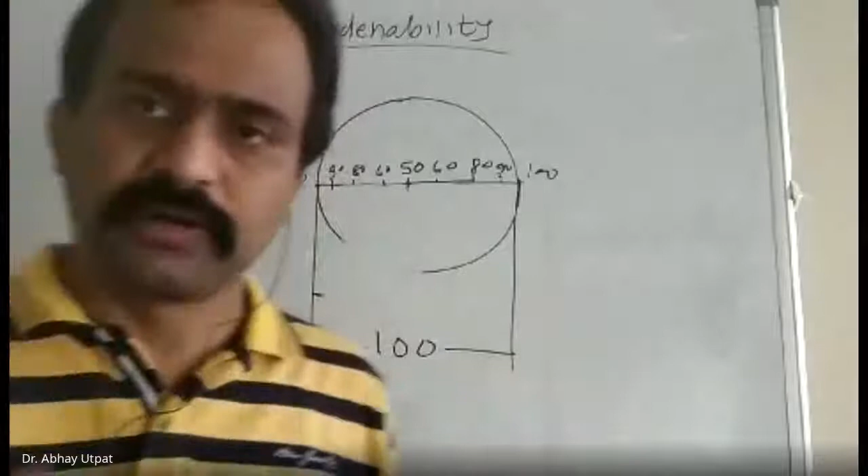Now suppose you are the customer, and I am the owner of a company or a metallurgist in a foundry or heat treatment shop, a regular manufacturer of components of different size and shape. As a customer, you want to know: I have this component and I am using this quenchant. If I carry out the hardening, will this part be thoroughly hardened or not?

So this is the question of the customer to the metallurgist. I repeat: I have this component, whether this component will be thoroughly hardened or not. Now, without checking, how can we tell whether it will be thoroughly hardened or not?

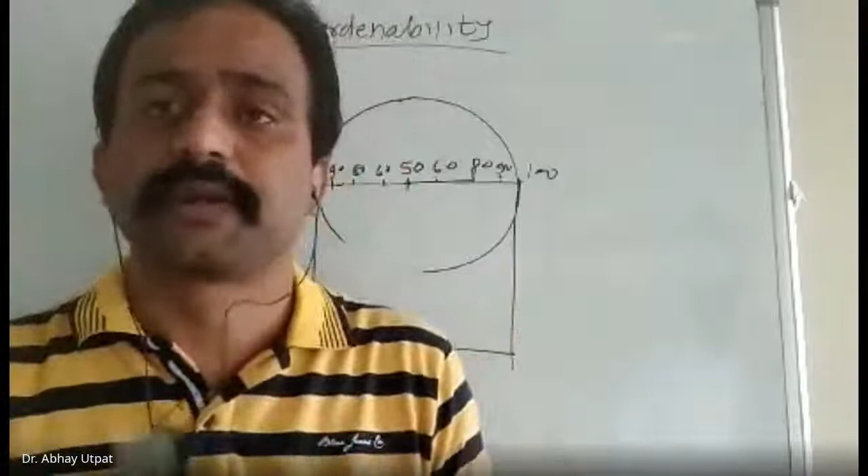So some experiments are carried out based on the concept of hardenability. The technocrat or metallurgist or owner of the company, through his team, will carry out one of the experiments, and without testing the customer's part, a report can be given: yes, if you use this material, this size, and this quenchant, your part will be thoroughly hardened. Now you decide what size to keep and which quenchant should be used.

So these are nowadays very important requirements in the industry, because if you blindly carry out the hardening process taking any quenchant, you may not get good hardness, and there may be failure of the component. That's why the method for finding hardenability must be studied.

Before we find the method for hardenability, recall the concept I told you: a part can be considered hard when at least 50% martensite is present. So you must know, every time we are not going to take the cross section, prepare the specimen and see under the microscope. Without the microscope, this judgment is given.

But for that purpose, some data is required. You have to check the hardness corresponding to 50% martensite. This means you have to prepare the sample and check under the microscope, locate where the 50% martensite is, make a mark, and then that part is kept under a hardness testing machine and hardness is measured.

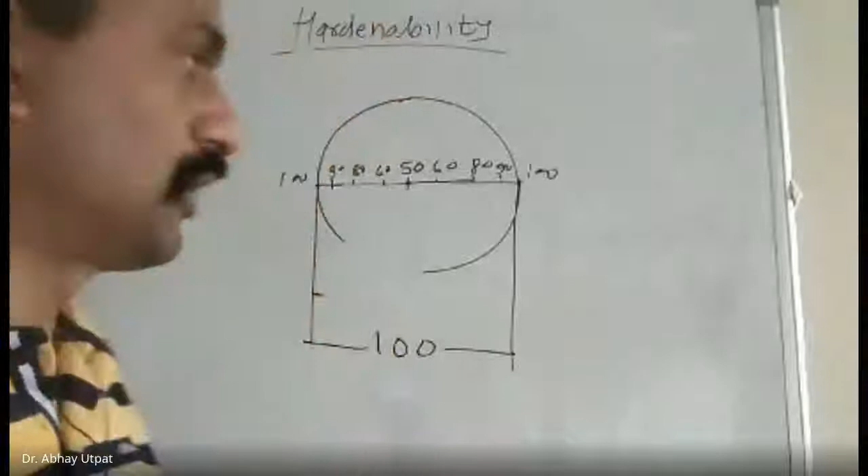For example, in the figure I have drawn here, I have shown that this part is thoroughly hardened because 50% martensite is present at the center, but it may not happen every time.

Now for that purpose, there are two experiments corresponding to measurement of hardenability. These two experiments are: first, Grossman's critical diameter method, and second, Jominy end quench test. Just write down the title: experiments carried out for measurement of hardenability.

First is Grossman's critical diameter method, and second is Jominy quench test. These are the two tests used for measuring the hardenability. Let us see one by one.

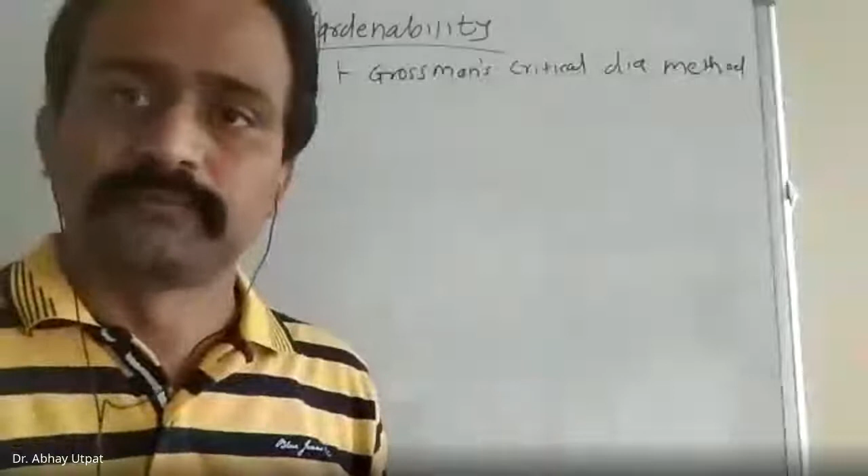Now I will follow Grossman's method. What I will do: first, I will prepare a number of samples of the same material used by that customer, because I will take the name of material from him. Then he has produced sample bars on the lathe machine. Before that, the hardness of that material corresponding to 50% martensite is found out. That data is required.

Suppose this is the plot where I put the sample. This is hardness, 0 to 5, 10, 20 RC units or BHN units, whatever it may be. Suppose this is the hardness value corresponding to 50% martensite - any value, suppose 25 RC. We are least bothered about the exact value; I only know that this hardness value corresponds to 50% martensite. It means if 50% is martensite and the remaining 50% is bainite, pearlite, whatever may be present, the corresponding hardness is this value, X value. Now, Grossman suggested the method.

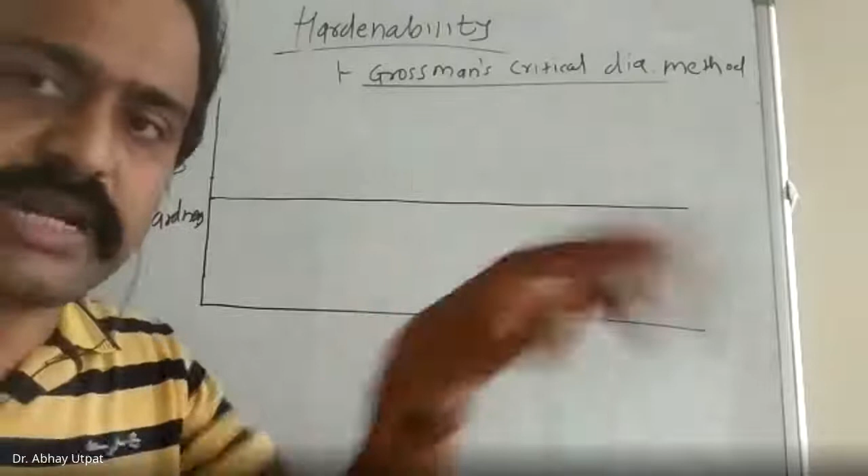According to Grossman, select a number of bars, start preparing the bars and start quenching them. I want to give information to that customer: what is the depth of hardness, what is that dimension up to which your part will become hard. So I will start, suppose, with a bar of 10 mm diameter.

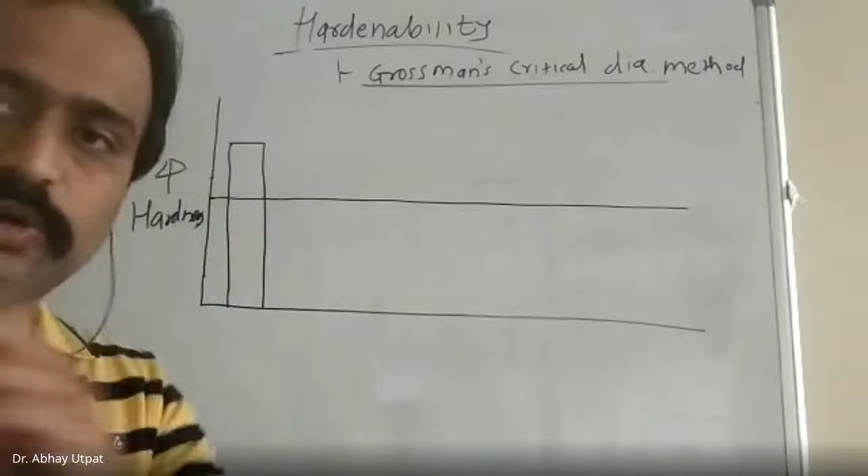This is one rod of 10 mm diameter. Now this rod is made of the same material used by the customer for making his components. This bar I will take, heat, soak and quench in the quenchant used by the customer.

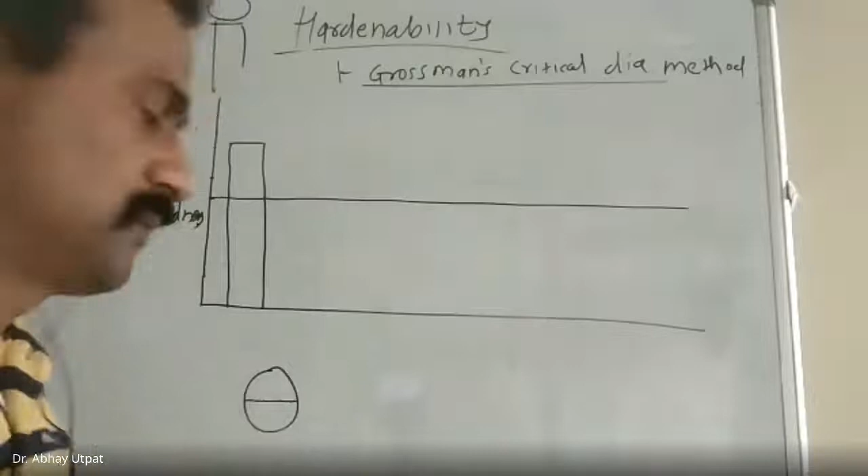After doing this, the hardness value is measured from surface to center. How? You have to take the cross section in this way. I will show here - you have to take the cross section and put your hardness tip, using a diamond or ball indenter. So here 1, 2, 3, 4, 5, 6, 7, 8, 9, 10 - at different points, hardness is measured, and that hardness is plotted here.

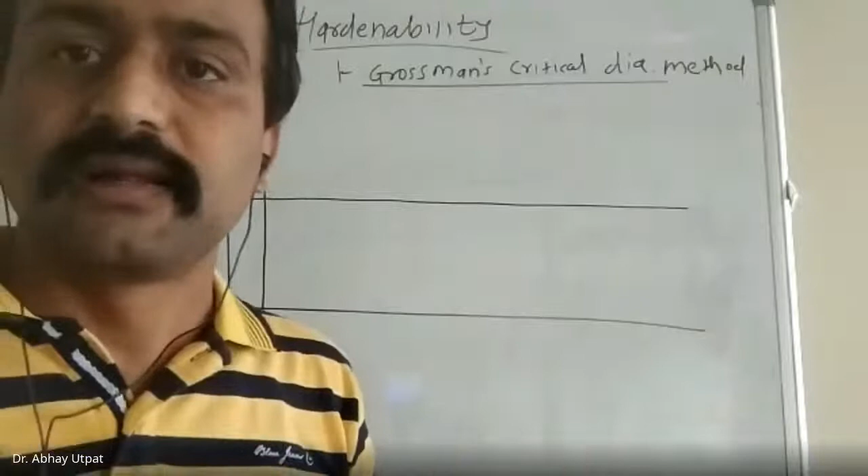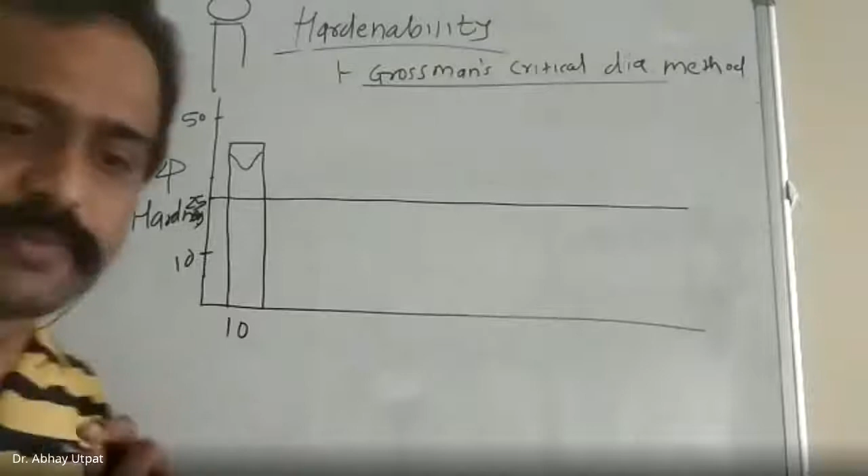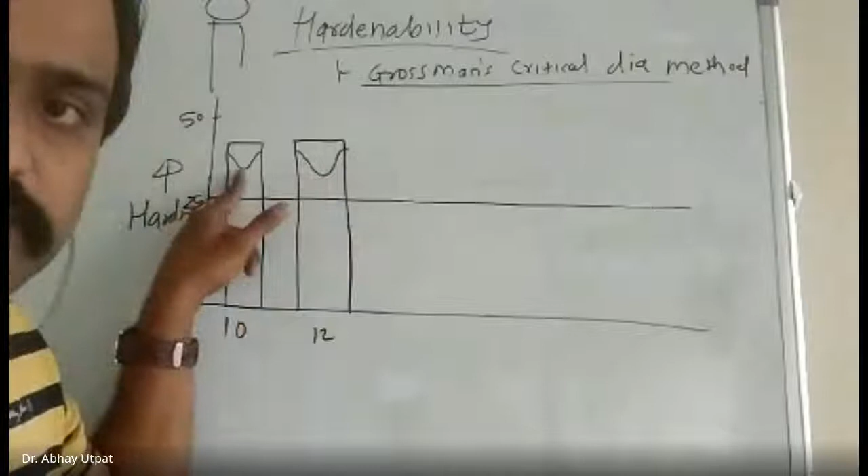Now the same experiment is repeated with a second sample of slightly higher diameter - this is a 12 mm diameter bar. The same experiment is carried out, and at that time you observe it in this way. Again, the hardness at center will be reduced compared to before, no doubt, but even then I can say that it is thoroughly hardened. At center, hardness is around 31, 32, which is more than 25.

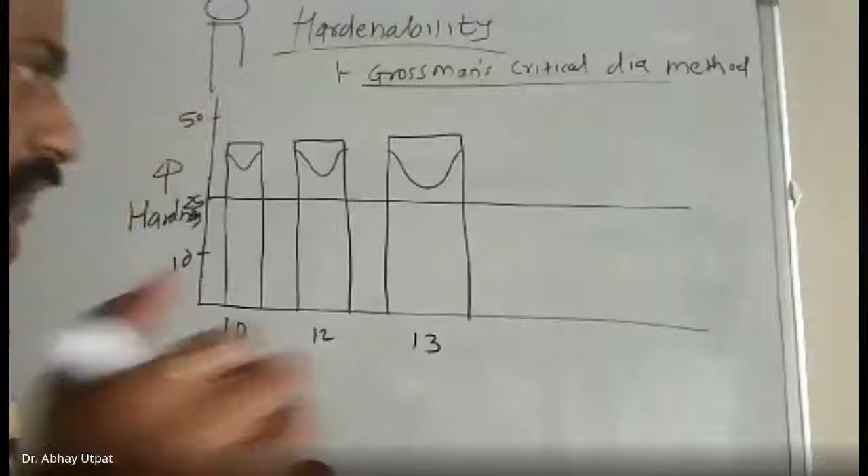Then I will carry out the experiment at 13 mm. I got this curve. Even I can say that this part is thoroughly hardened. I am not finding the correct dimension yet, so I will come back - but for your information, I have directly selected 15 mm, suppose, and I got this curve.

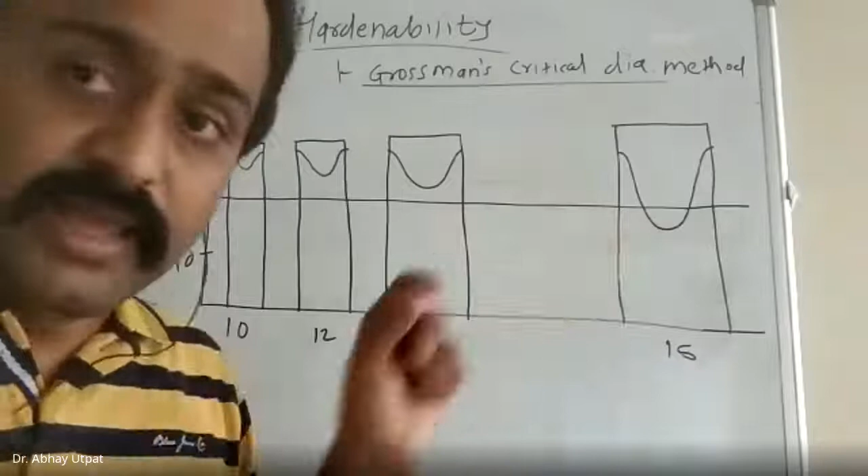What is the meaning of this? Hardness at center is less than 25. It means at center there is no 50% martensite - it is less than 50% martensite. So my aim is to find out that particular dimension where there is exactly 50% martensite at the center. Are you getting my point? My aim is to find out the dimension of rod where there is exactly 50% martensite at center.

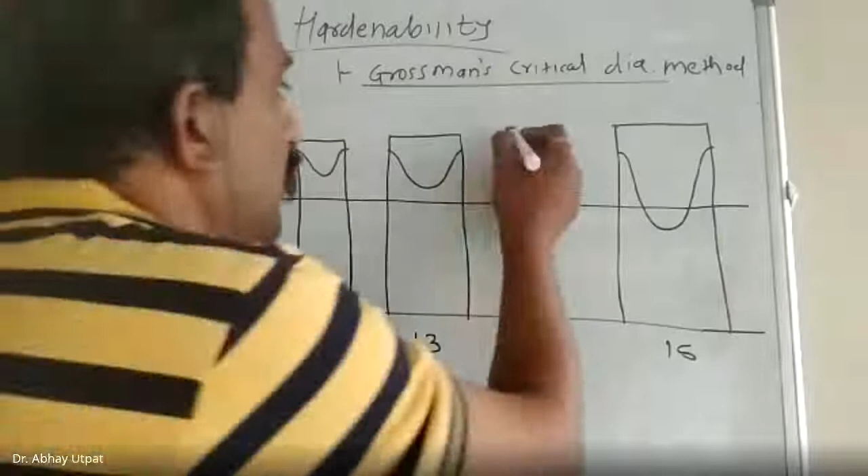By trial and error, 2-3 samples are tested - 13.5, then 14.5, in this way 3-4 samples are once again tested. Actually it may not be exactly 14, but for easy understanding I have taken 14 mm. It may not be a round figure - it may be 14.2, it may be 13.9, anything - but for your understanding I have taken it as a round figure. And for 14, I got this graph.

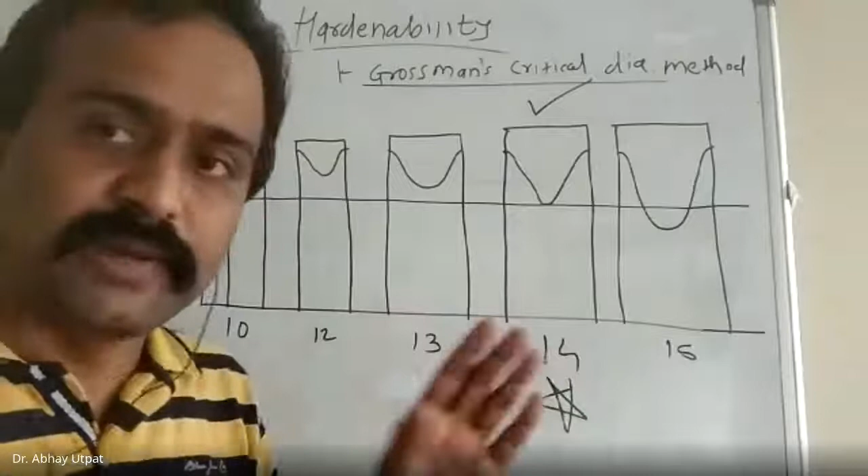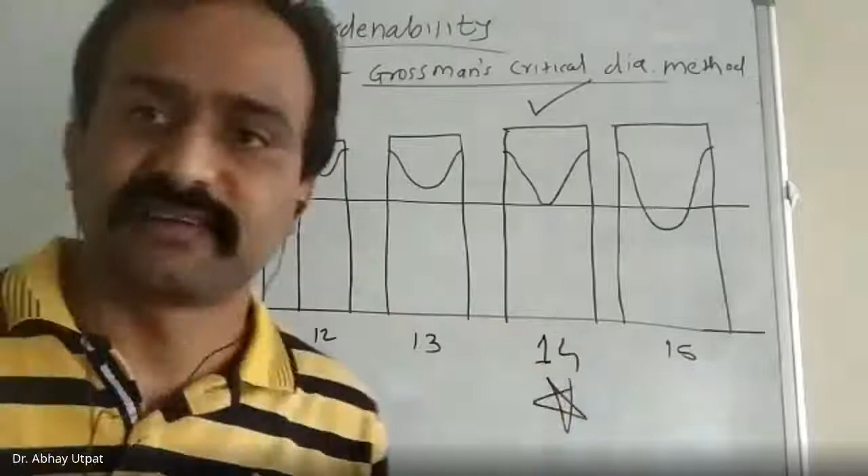That's why the method is called Grossman's critical diameter method. What is the meaning of critical diameter? 14 mm - that diameter where the part is thoroughly hard. Critical diameter means that diameter for which your part is thoroughly hard.

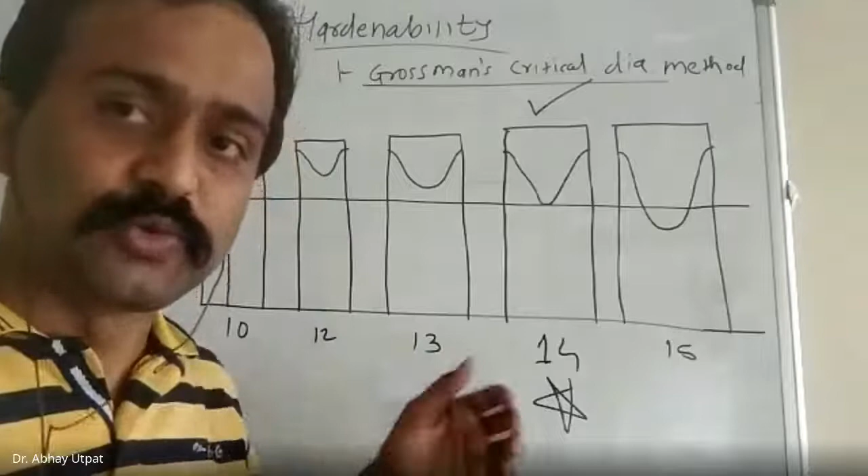More than that, you will not get hardness thoroughly, but less than it, all parts are thoroughly hardened. So this is called as critical diameter. Now what are we supposed to do and what are we supposed to tell the customer? This is an important question. Grossman has decided this method, but now it's our turn.

We have to give a written report to the customer because he has asked what is the depth of hardness. So I can write the report and tell the customer that if you use this steel and this quenchant which I have used during the experiment, your part will show thorough hardness up to 14 mm diameter.

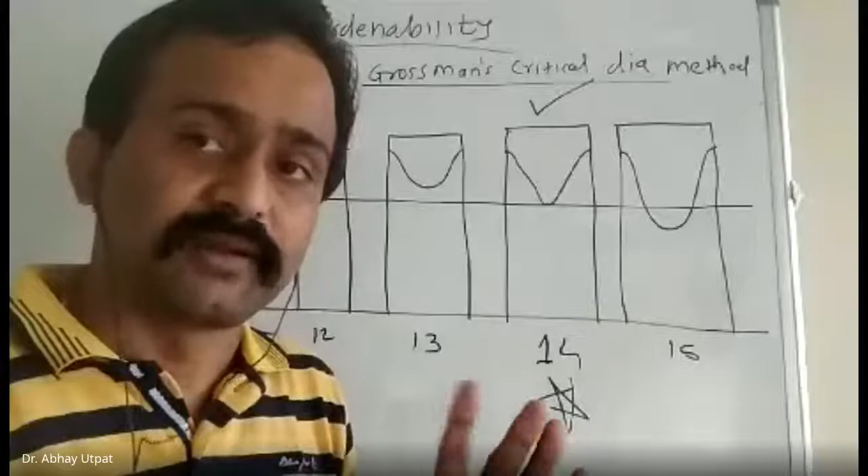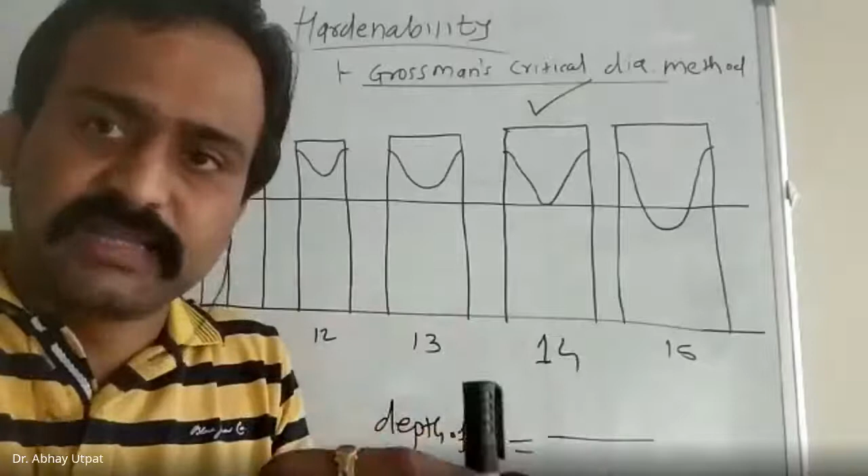Remember, then what will be the depth of hardness? Depth of hardness is equal to... somebody reply, unmute and reply. I find out 14 mm diameter which can be thoroughly hardened, meaning this is a 14 mm bar. I am quenching it, then I can say that this is thoroughly hardened, meaning at center, 50% martensite will be produced for a 14 mm bar. Now tell me, what is the depth of hardness?

Give stress to your brain, you will get the answer. How much? Please answer. Samruddhi says at 25% we can say that it is low.

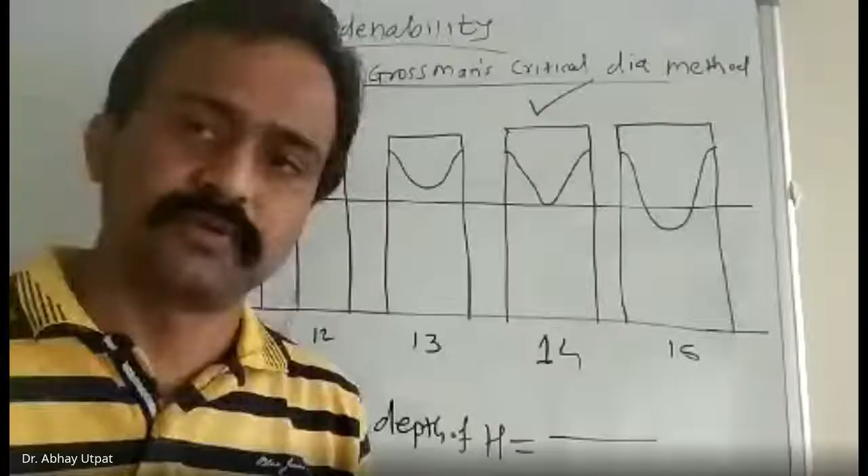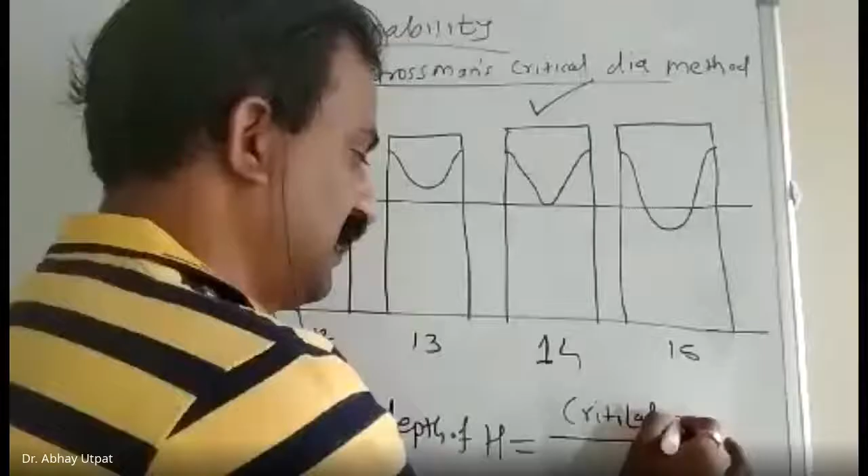You are not getting my question. My question is, 14 mm is the diameter. I am saying that this part is thoroughly hardened. My question is, what is the depth of hardness from surface to center? 7 mm, sir, half of the diameter. Critical diameter divided by 2 is the depth of hardness.

Are you getting my point? Because quenchant is touching from all the sides, so 7 mm from this side, 7 mm from this side, 7 mm from this side. From all sides, effect of quenchant is up to 7 mm only. This is the outcome of the experiment, and this is the judgment which I am supposed to tell that customer. I can say that if you use this steel and this quenchant, you will get 50% martensite at 7 mm

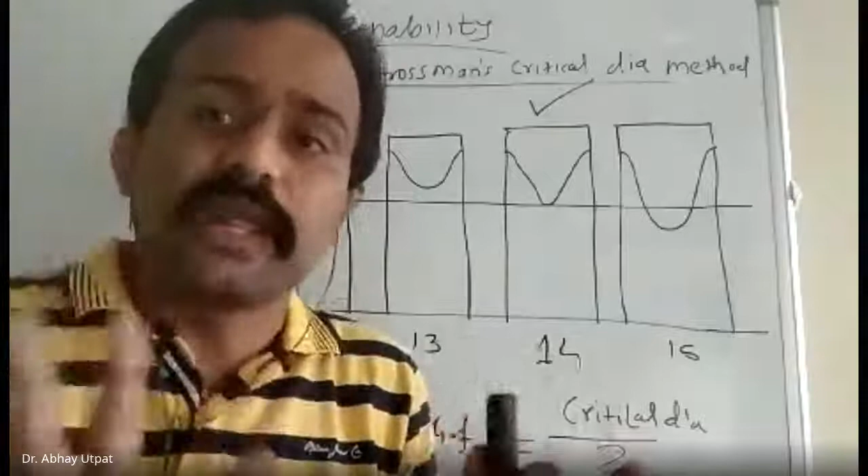where your quenchant is touching. You take any shape - if you take round shape, 7 mm from all sides; if you take square shape, 7 mm from all sides. Up to that depth only, your part becomes hard. This will be my judgment and result, which I will give to the customer. This is called as depth of hardness.

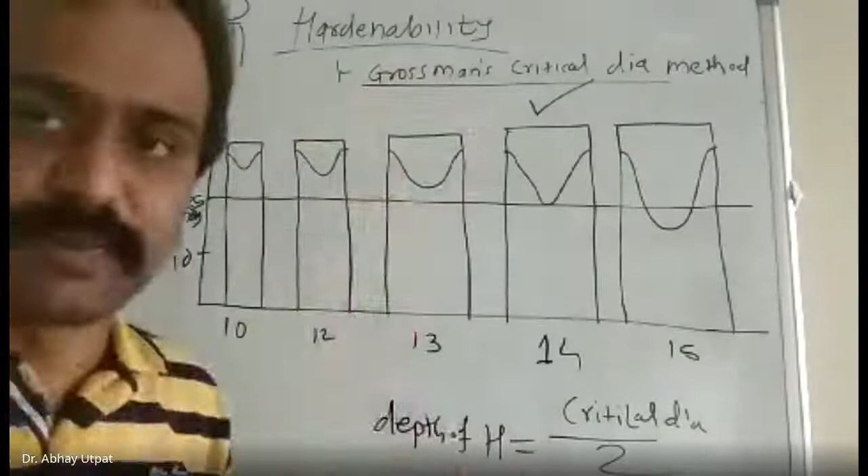This is extra information I am giving for interview and oral purposes. You must know, as a technocrat, how to find out the critical diameter. Please draw this, you must know the names. You need not know the procedure, that's why I am not dictating it. Please draw this.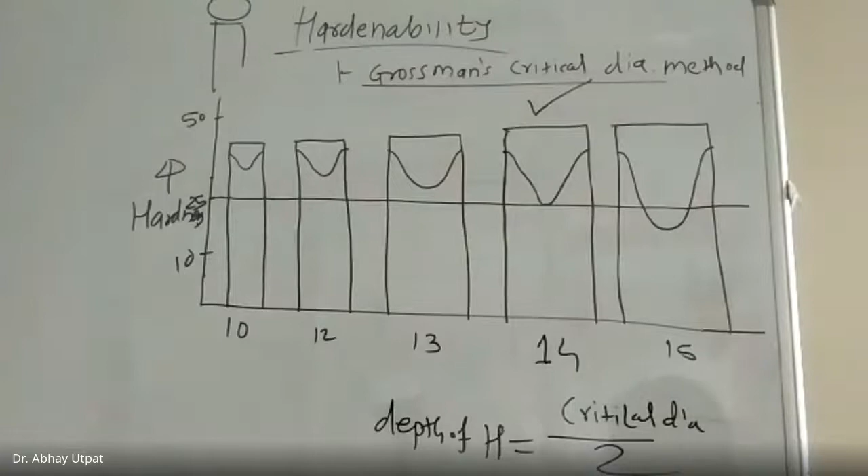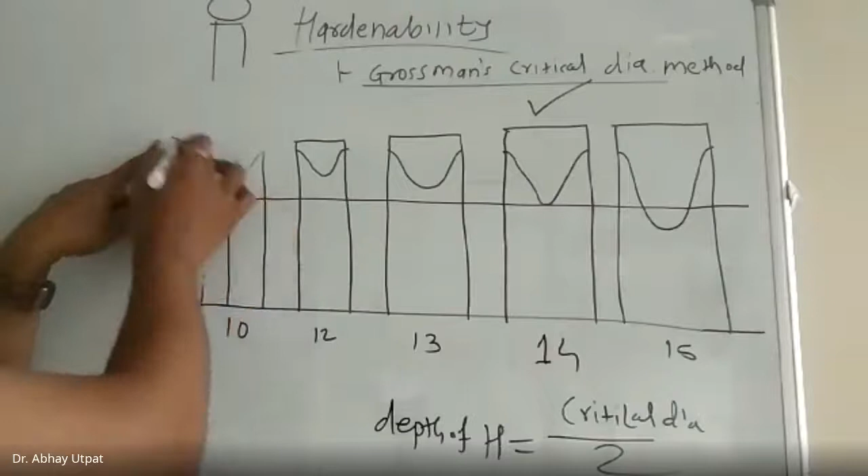Now, second method: Jominy end quench test. Sorry, write here this line in this way: hardness corresponding to 50% martensite. Please write this statement, I will read it. This line is hardness corresponding to 50% martensite. I repeat once again, this line you have to write: hardness corresponding to 50% martensite.

This will not be part of theory, but as an extra experiment, we are going to conduct it during practicals. If the pandemic situation clears and becomes normal, you will be in college, and at that time the focus will be given to experiments first, since we haven't conducted any yet. So it's not in the syllabus, but we have the instruments and will conduct it as content beyond syllabus. At that time I can show you, or you can Google it and enjoy it. It is available on YouTube also.

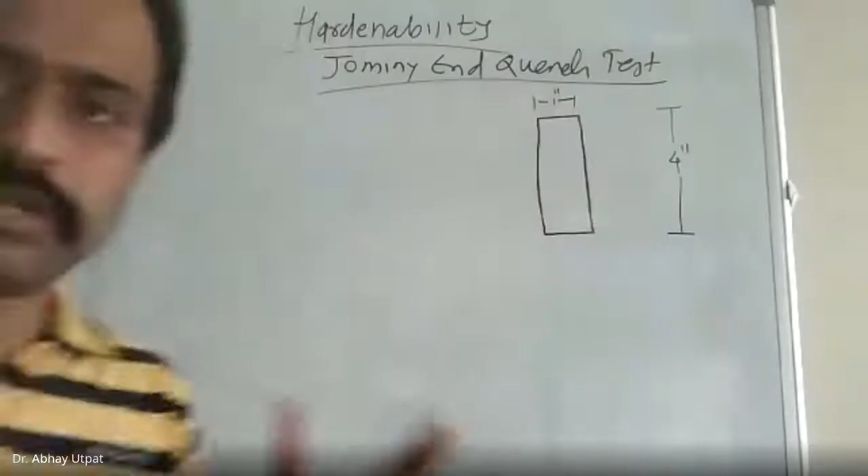What did Jominy do? Jominy used only one single bar. This bar is 4-inch long and 1-inch diameter. Four-inch long and 1-inch diameter. This is the specimen prepared by Jominy.

Now, when a customer comes to me with a drawing and asks me to tell the depth of hardness for this specimen - any complicated drawing the customer may have - then as a technocrat, I will ask: please tell me the type of material and which quenchant you are going to use.

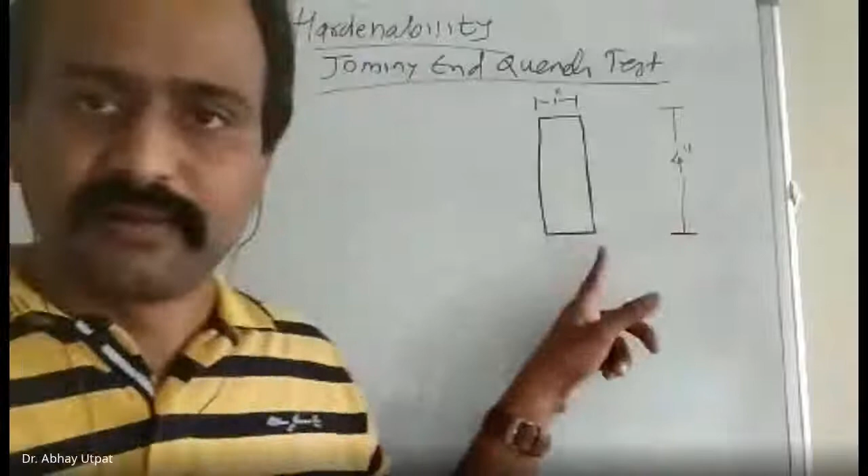So I will machine the bar using the same type of material, even though the customer's component is different. Same way, Jominy also prepared the bar using the same material number, same as Grossman. But he produced only one bar of 4-inch length and 1-inch diameter. So this bar is prepared by Jominy using the same material.

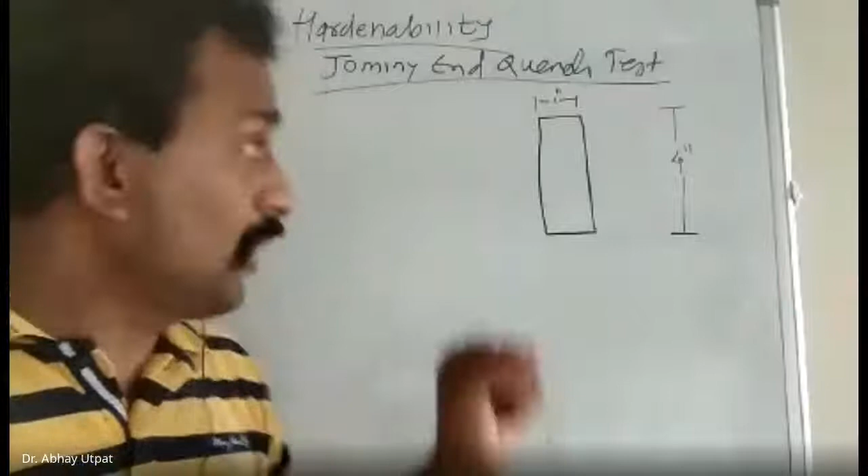Now, he prepared one setup. Why is it called end quench? End means at the end of the bar. Grossman was doing it thoroughly - this bar was dipped into the quenchant bath, where quenchant would touch all sides, and then he was measuring the hardness.

Jominy suggested a simpler method. He wanted to find out the effect of quenchant from the surface where it touches, inward. Wherever the quenchant touches, from that surface up to how much distance inside does the quenchant make an effect? What does 'making the effect' mean? It means the fast cooling rate given by the quenchant - up to what depth the cooling rate is so fast that 50% martensite is produced. That is found out just by touching at the end.

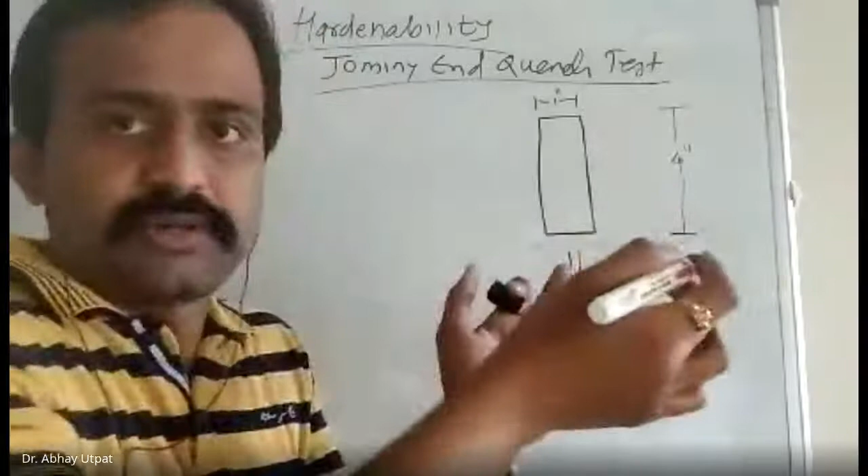For that purpose, the arrangement, setup or fixture has one nozzle, and through that nozzle water is forced. This bar is fixed at the top with the help of some screw, etc., and a half-inch distance is kept below this bar. As soon as water comes, it is adjusted so that the water forms an umbrella shape.

I hope you are getting my point. Water will not directly go above this; the fixture is made accordingly and the water pressure is adjusted so it will only touch at the end. Now I am saying water, but if water is used as the quenchant, fine - but if the customer is using brine, use brine here. Whatever quenchant is used, use that quenchant here.

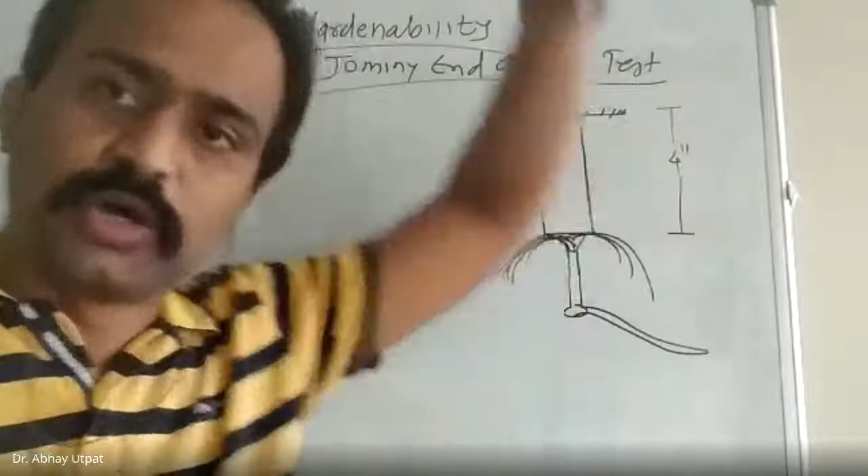Now this part is not kept as it is here - it is first heated to the austenitic range, soaked there for sufficient time, immediately taken out from the furnace, and then fixed in this way. Assume that this is the furnace, and assume that this is the fixture. In this picture, this part is held and water touches it from the bottom.

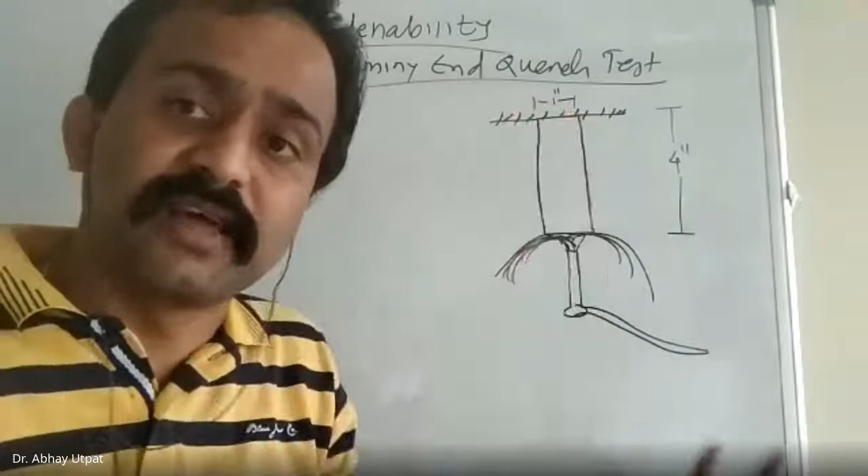So the water arrangement is already ready - you only have to take this bar from the furnace and fix it in the fixture, then wait. Initially, within a few seconds, you observe this bar totally red hot. Then, as it is in the atmosphere, the bottom side is in contact with quenchant, but more than 95% of the part is in air - yet the quenchant is making an effect. We have to find out up to what distance it is making the effect.

Now, this complete part which is open to atmosphere will be normalized, because normalizing is air cooling. And we have to find out how much length of the part becomes harder - I'm using the word length because it is length.

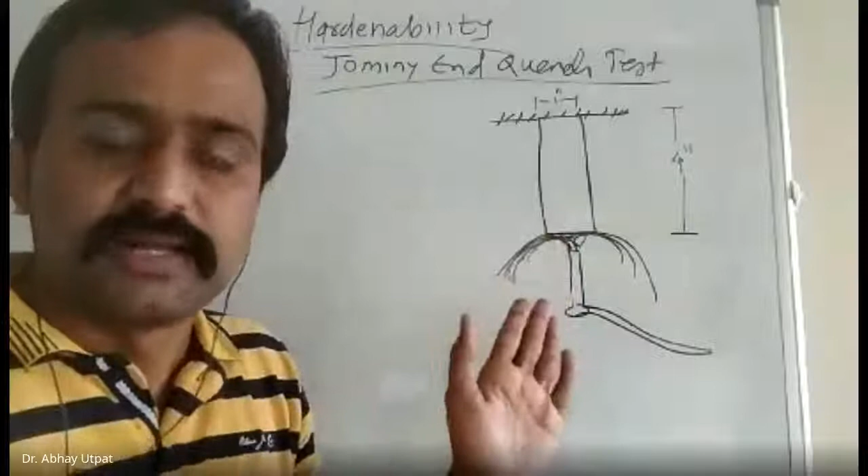So after doing this for a few minutes, once it becomes cold, you have to take it out. After taking it out, you use polish paper to remove the scale, and this bar is kept on the hardness testing machine horizontally, like this. See here how I am showing.

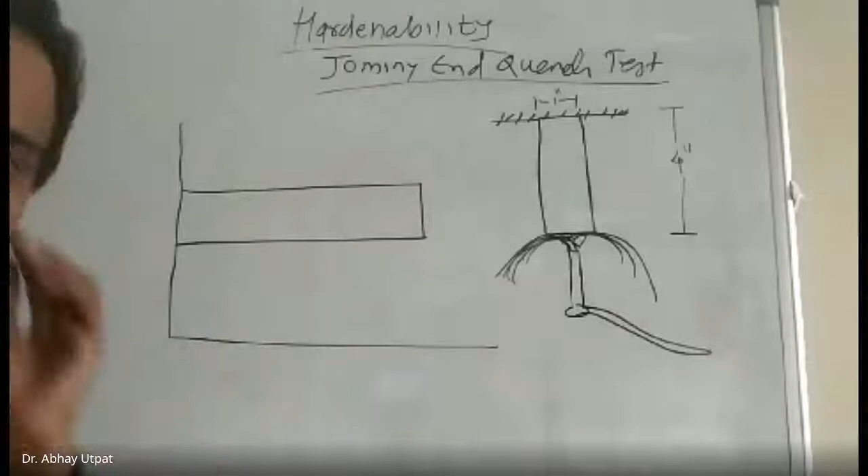I will put this on the graph paper directly. Here, this is hardness value, length, length of the specimen.

This bar is taken from this fixture, polished, and then you have to measure the hardness from quenching end to air end. This is quenching end, and this part you have to make marking, and this is air end.

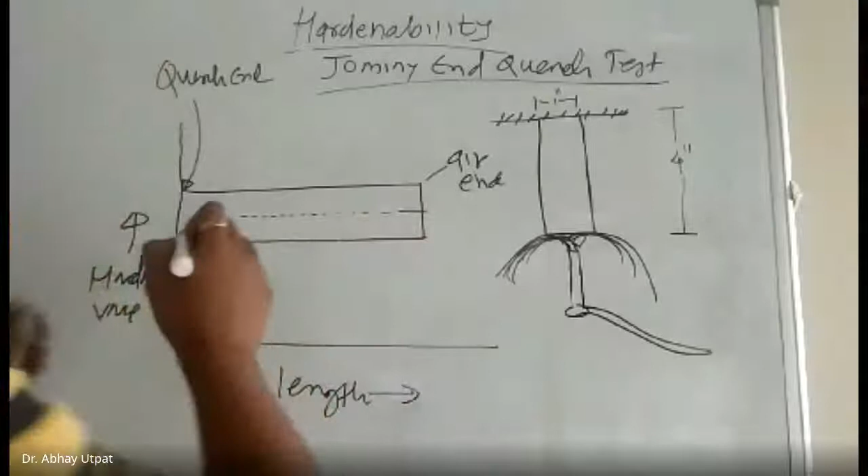And in this way you have to make markings. If I measure the hardness, now imagine this is a two-dimensional figure. Imagine 3D, so here I am observing from top. So if I measure the hardness at this point, suppose if this is the value on this scale.

Suppose it gives 40 value. If I go to the next point, hardness value drops to 38. If I go to third point - this is first point, second point, third point - hardness value drops to 35. If I go to next point, fourth point, I get hardness value suddenly drop.

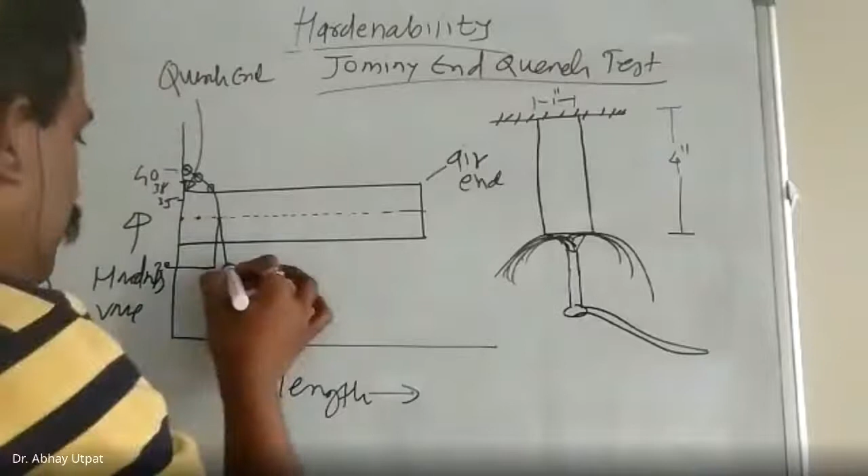For this point, I have measured the hardness, suddenly drop here, 20. And from here I got this one, almost inclined, not a straight line, but almost a straight line, for all these points.

Try to understand this graph. I mark this point - I repeat once again, this is quenching end. This bar is taken and put on the hardness testing machine. So in the same way there is a pad on the hardness testing machine. Assume that this is your component. This hardness testing machine is having the tip or diamond.

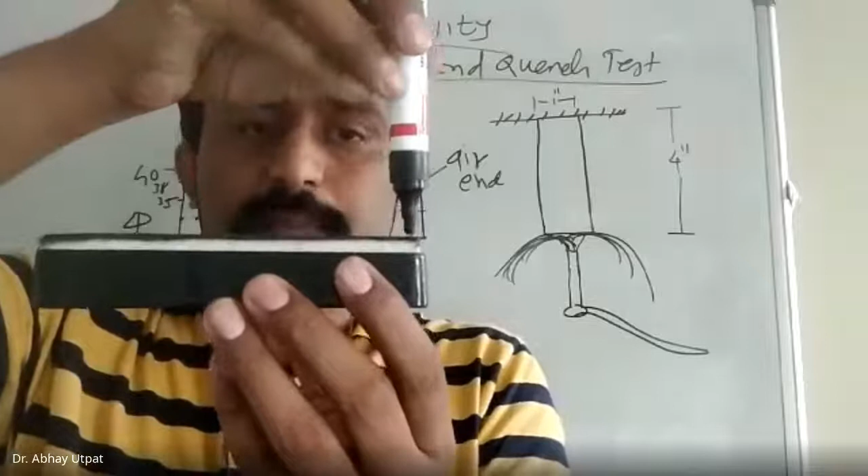So this is quench end and this is air end. I measure the hardness here at this point, I got 40 RC. Immediately I go to next point, just by 1 mm distance, I got 39. Third point, hardness 38. The distance between each point is 1 mm, not more than that. Fourth point, 38. Now fifth should be 37 or 36.

But fifth point, I got 20 hardness. Sudden drop - 40, 39, 38, and direct 20. So at this point I got hardness 20. And hereafter, whatever points I go on measuring the hardness, I got 19, 20, 19, 20, same way.

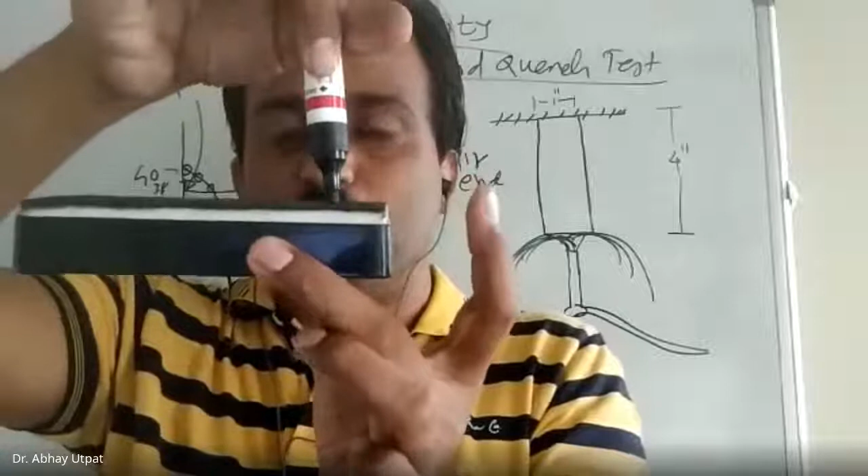What is meaning of this? Meaning of this is from quenching end at this distance, fifth point, effect of quenchant is there. And suddenly after fifth point, in the air, majority part is in the air. That's why it is normalized and produces the pearlite.

Indirectly, if I measure or see the phase at this end - this is quench end - so 100% martensite, 95% martensite, 90% martensite, 85% martensite, directly 20% martensite, and thereafter only 10-20%, or here again 0% martensite. Means what? After a particular distance, the complete part is under air cooling.

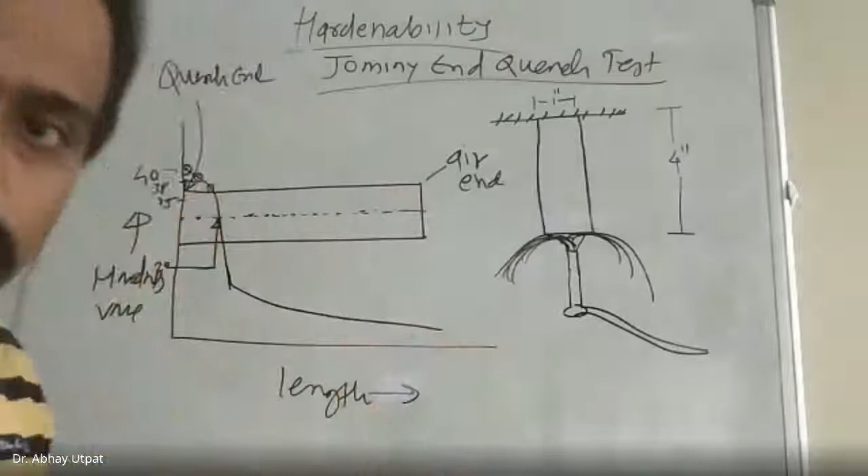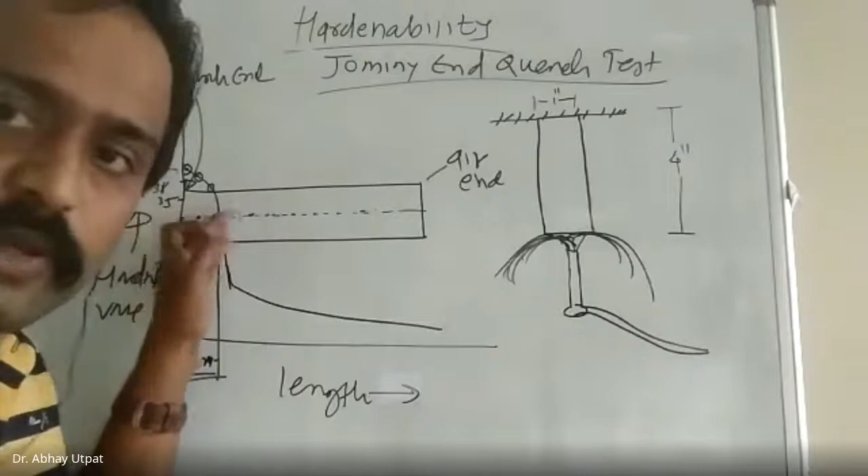And effect of quenchant from quenching end up to a certain end is limited, and now we have to find out this distance. Suppose this distance is 5 mm. Means at end hardness, martensite is 100%. 1 mm 95, 2 mm 95, 3 mm 90, 4 mm 89, and 5 mm directly 20% martensite. Means sudden drop in hardness. So up to 5 mm quenchant has made effect.

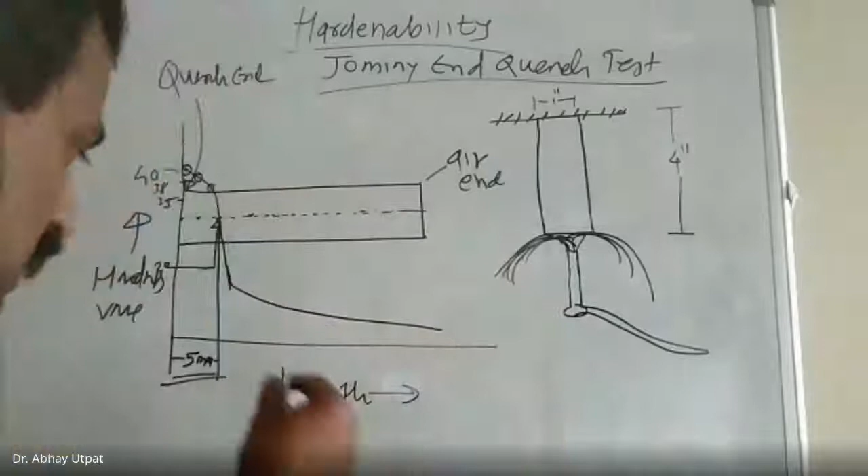This is the concluding remark of Jominy. What Jominy said - when you carry out this experiment, when you heat in the austenitic zone and end quench, this quenchant can make effect up to 5 mm length if you use this quenchant and this material. Now this is the outcome of Jominy, and now Jominy will prepare the report for the customers.

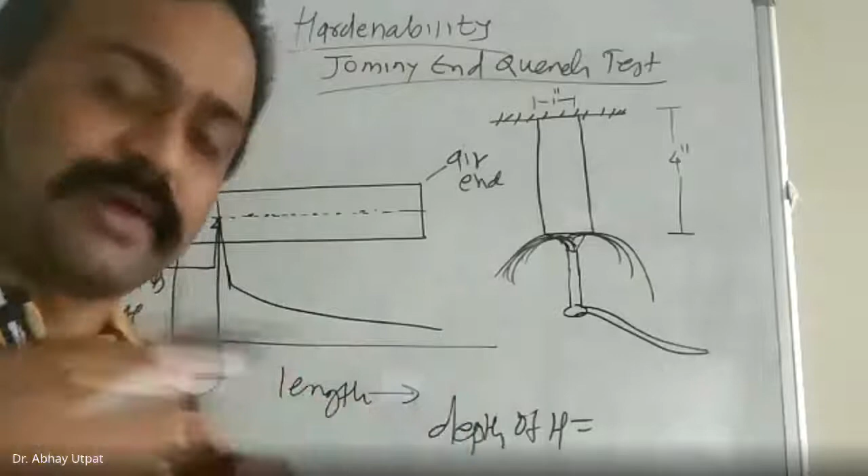And now, once I am the customer, I will go in the role of customer. I know that for my material with this quenchant, I am getting depth of hardness 5 mm. So now let us see the illustration. Before that, you draw this.

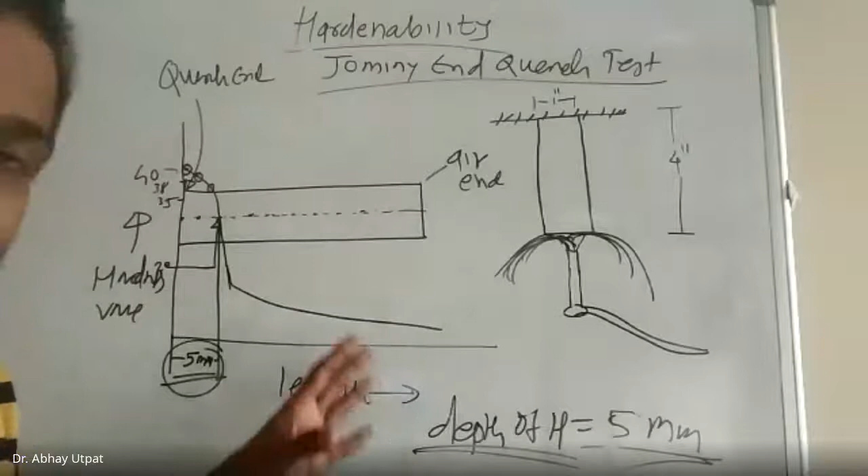Right here, quenchant, air end, and these values of hardness, sudden drop. Now, what is the separate or indirect thing here? Length of hardness is treated as depth of hardness.

So here you can write: length up to which 50% martensite is produced equal to depth of hardness equal to 5 mm. Length up to which 50% martensite is produced equal to depth of hardness equal to 5 mm. This is just for an example.

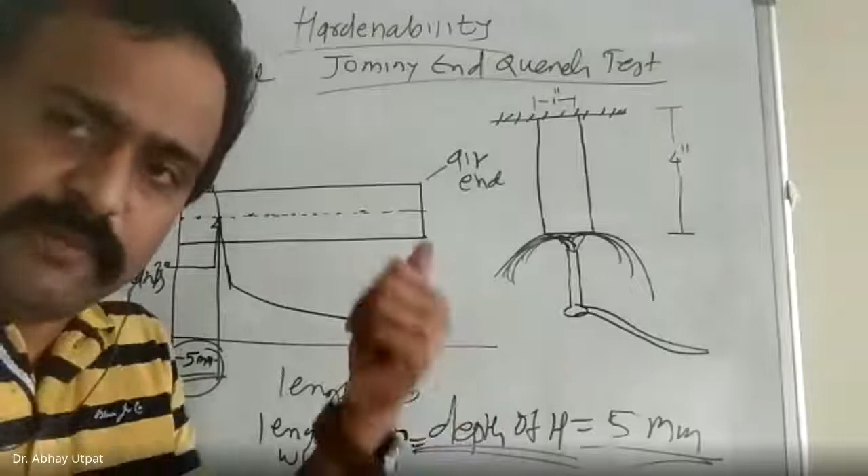It may be 3.5 mm, it may be 7.6 mm, any distance. For easy understanding I have taken this. Now let us see the illustration. May I erase this?

Please reply. Wait, sir. Okay. Dimensions you write: 1 inch diameter, 4 inch length. See, Jominy specimen.

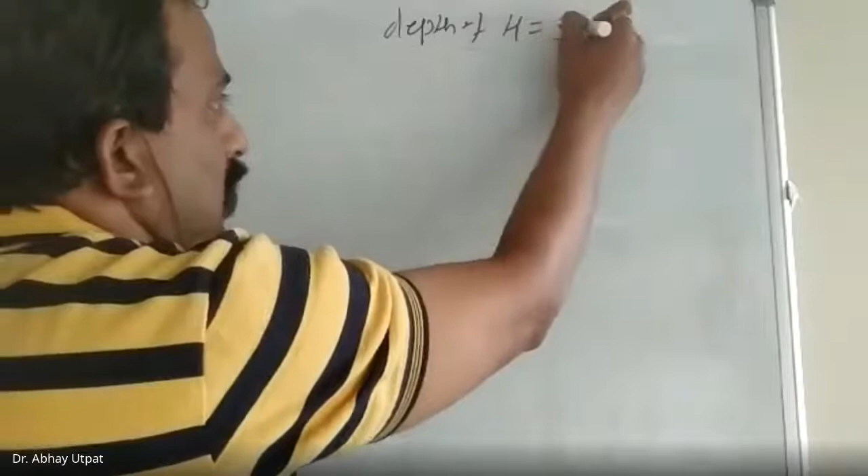Now whenever I ask question, you have to immediately unmute and answer. Suppose depth of hardness equal to 3 mm - this value I have obtained by either Grossmann or Jominy. And now I will draw one specimen or component. You have to answer whether it will be thoroughly hardened or not.

This is one hollow cylinder. This is a hollow cylinder. One minute.

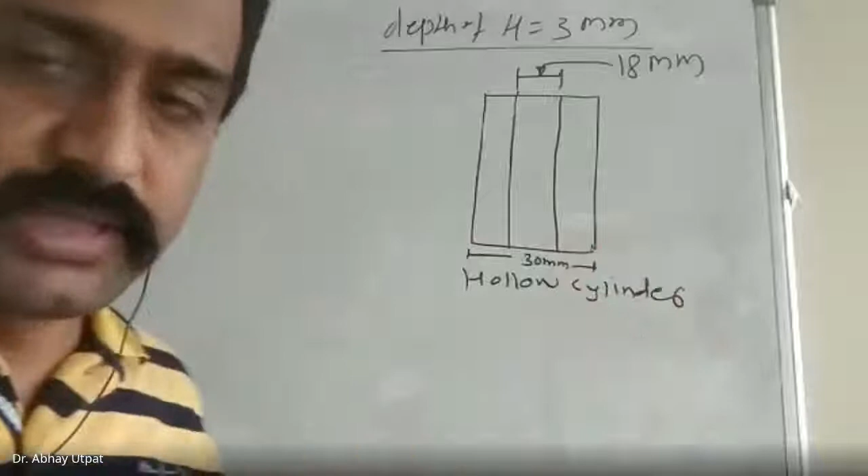Take 1 minute. My question is whether this cylinder will be thoroughly hardened or not. Depth of hardness is 3 mm.

Yes? Anybody willing to answer? Yes sir, please justify. Who is giving the answer? Sir, Dhanashri. Correct, your answer is correct. Please justify so others will also understand. Sir, that thickness is 6 mm.

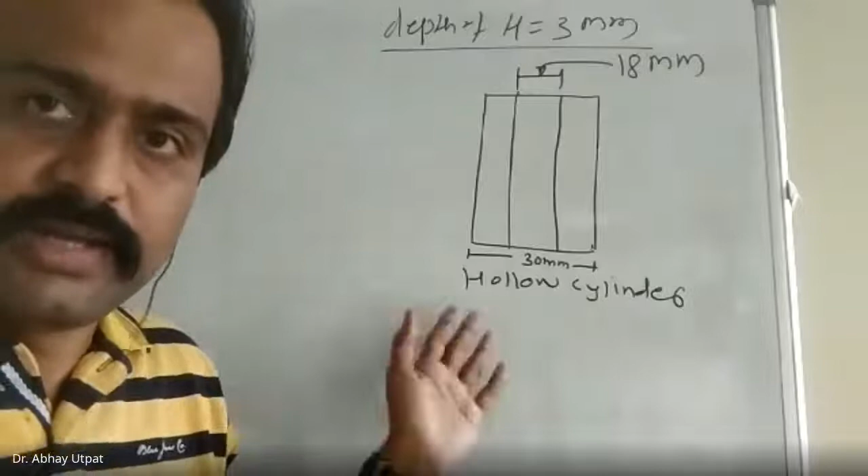Correct, because it is symmetrical. By default I said it is a hollow cylinder, so it is symmetrical. This is 6 mm, this is 6 mm, because 30 minus 18 is 12, so this is 6, this is 6. Now, from both sides the quenchant is effective, so that's why it's correct, absolutely correct.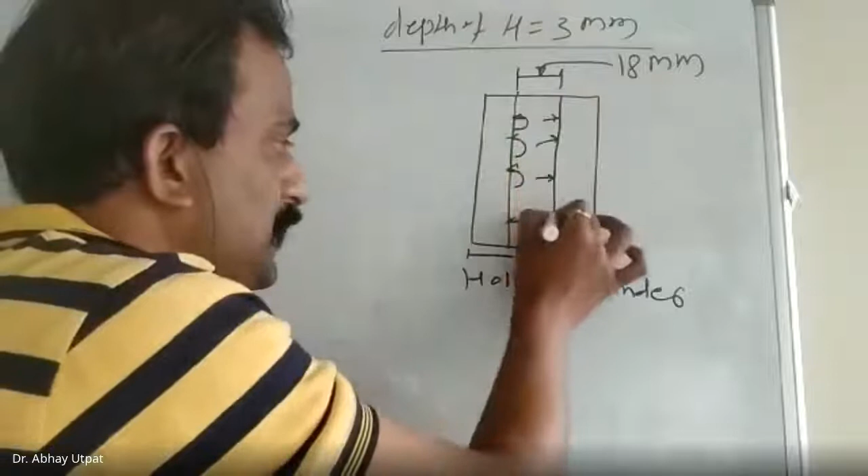As this is a hollow cylinder, when you dip it in the bath, quenchant is going from inside also, touching this surface. Quenchant is touching this surface, quenchant is touching this surface, quenchant is touching both these surfaces.

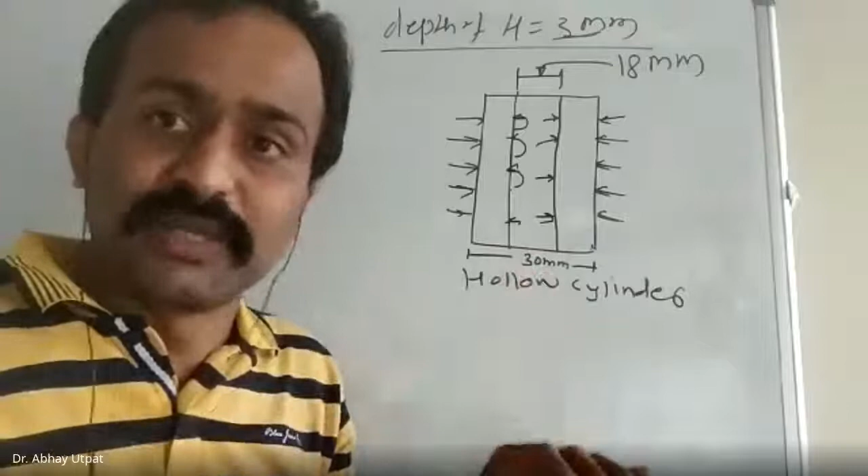We know that 3 mm is the depth. How much is this? This is 6. So 3 mm from this side, 3 mm from this side, meaning 6 mm. Meaning I can say that this part is thoroughly hardened. So don't go by dimensions 18 or 30; in this way you have to find out. This is the significance of depth of hardness. This cylinder is now thoroughly hardened.

Let us take the answer: you're right, thoroughly hardened. Second example.

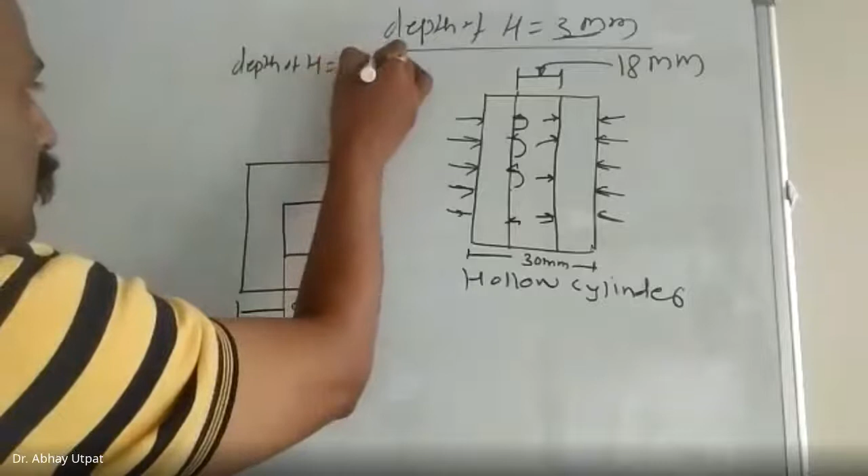This is one square cross section part, you can say a square prism. I have taken the cross section and it is hollow. Again it is hollow, and outer square is 50 by 50, inner square is 20 by 20. And Jomini and Grossmann method has given, for the same material, 5 mm as the depth of hardness. Now my shape is different. Answer whether it is thoroughly hardened or not.

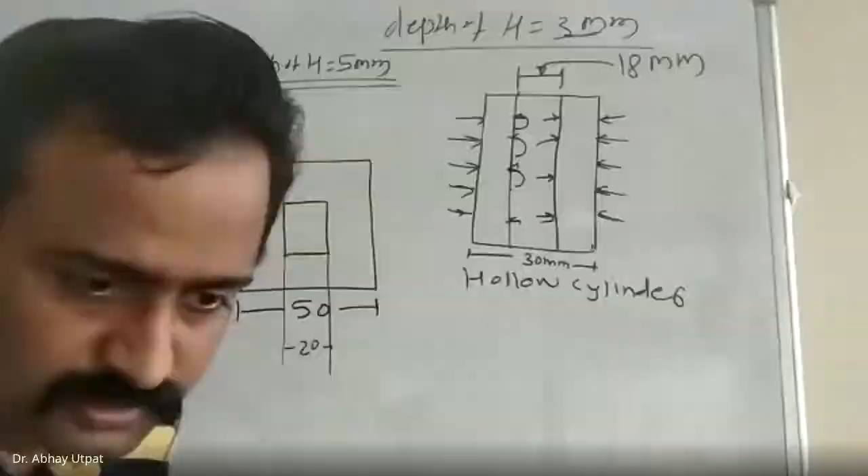It is not thoroughly hardened, sir. Correct, who is talking? Omkar Kale. Correct answer, justify. The whole length of the square is 50, minus 20, then remaining will be 15, 15.

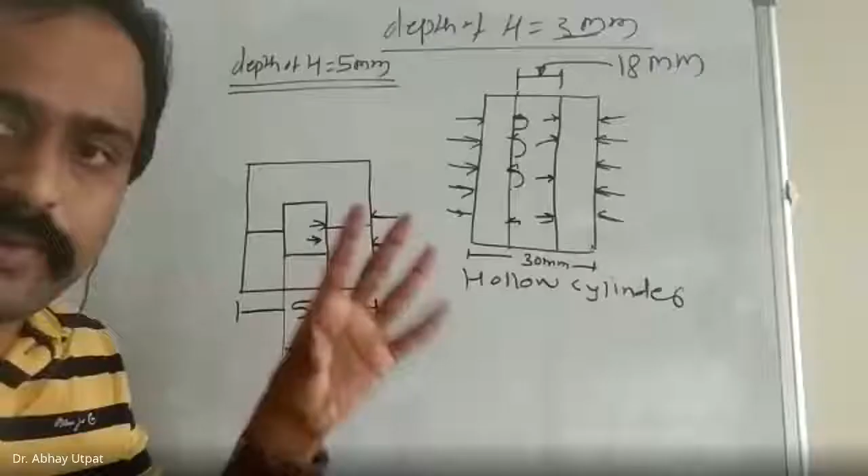So from this side the quenchant is touching, this side the quenchant is touching. So how much effect will it make? 5 mm, 5 mm. So this side 5 mm, this side 5 mm, it becomes 10, but this distance is 15. Meaning it is not thoroughly hardened. I will show the band of hardness, you will understand.

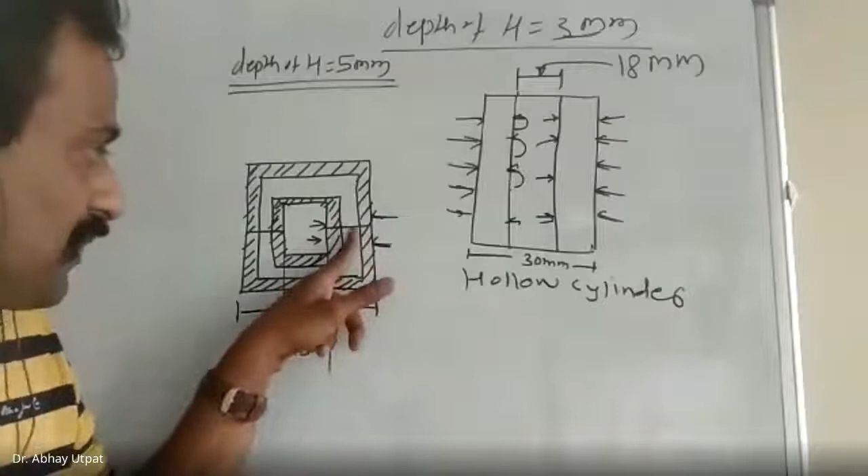The hatched part means hardened, and this gap is not hardened. Are you getting my point?

So the significance, how to use the significance of depth of hardness: 5 mm from both the sides means we can say that the part is not thoroughly hardened. And suppose I want to make it thoroughly hardened, this distance I have to maintain at 10 mm only. In that case, I have to increase the size of the 20 mm square hole. Are you getting my point?

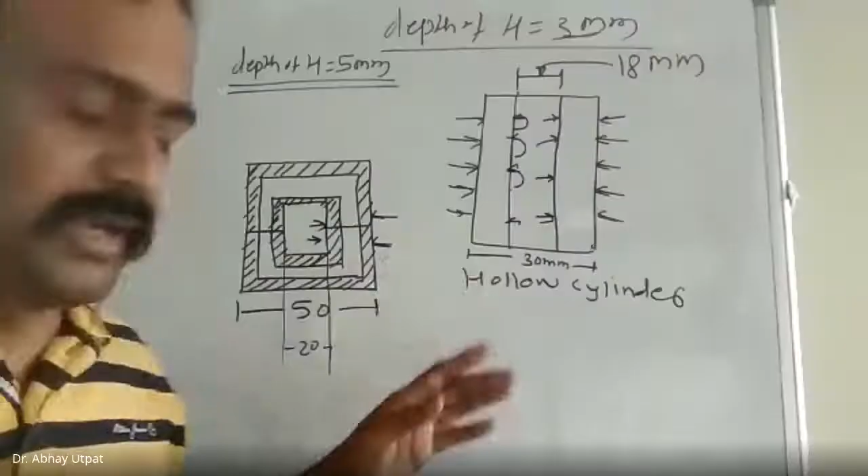Please answer. Yes sir, okay. So this is the significance of depth of hardness, and this is called case depth.

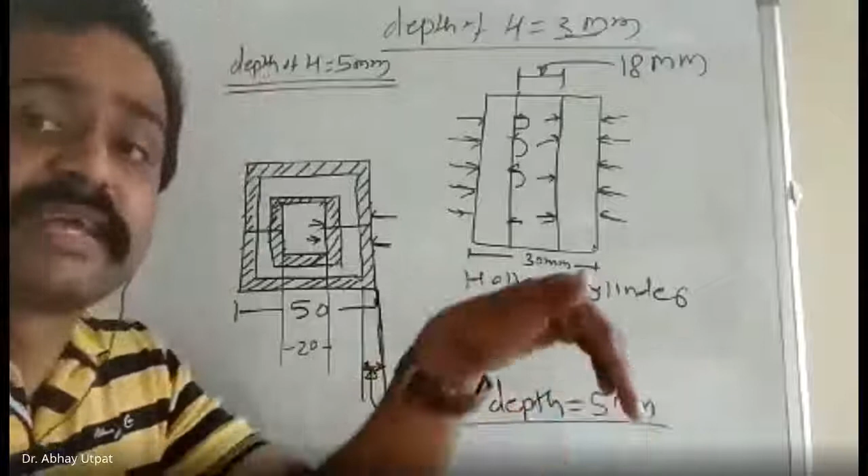Remember this word, case depth, because from tomorrow's class they are going to start this topic. Case depth equals 5 mm. Another name for depth of hardness—depth of hardness is used up to what mm, called case depth—the part is hard. So this is a technical word, so technocrats are using it. What is the case depth of your hardness? This 5 mm is the case depth of hardness.

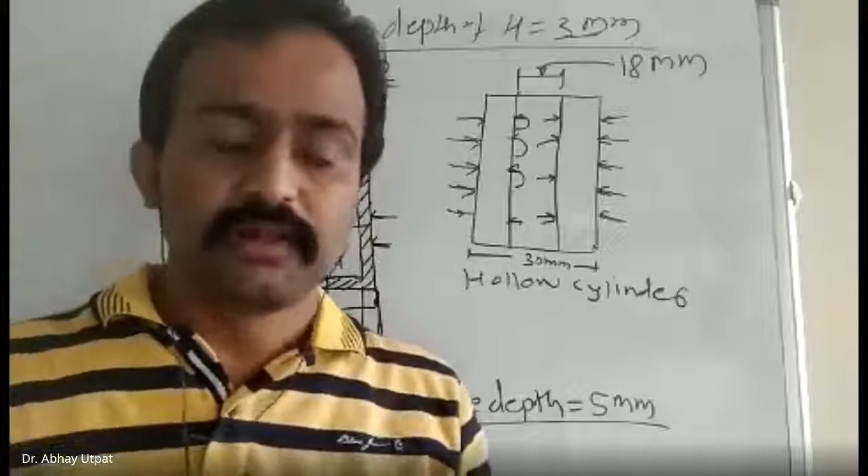And now, in industry there are many cases where you don't want thorough hardness. Now see, I am telling you something contradictory, I repeat my statement once again: in industry there are many requirements where you don't want the part to be thoroughly hardened. You want to make it hard only up to a certain depth. Example: gears, cams. What is the need for that, we are going to explain in the next lecture.

And the name of this hardening is case hardening or surface hardening. So friends, the significance of hardenability, how it is important—even though it is not part of your exam, this today's lecture is very important because it is going to be asked in interviews and orals. In orals you can compromise with other questions, but if you give such answers in interviews, chances of selection are more. Okay, so we will stop here, and in the next class we will start with case hardening. Thank you very much.